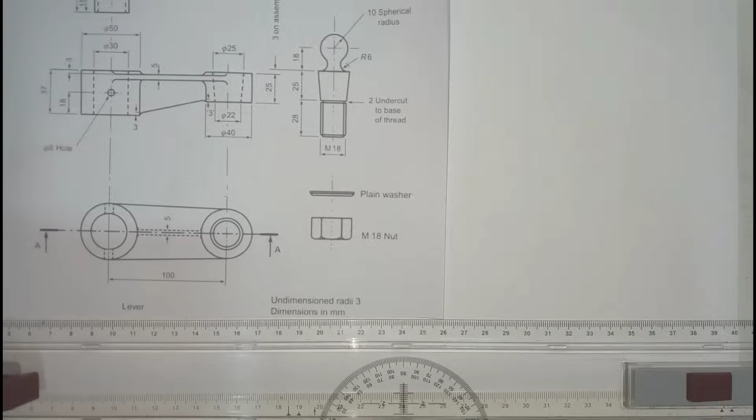In this video, we're going to look at assembly drawing. So we're given a problem and we want to draw the sectional front view on the cutting plane AA. So this is the cutting plane AA. I'll explain what it means later. And we also want to draw the plan. We're given some instruction: do not show the hidden detail of the nut.

Okay, so now we have our parts. So this is the front view, this is the plan, this is the front view, and we have this part, it's bush, this is the bush, and this is the nut, and we have a washer, and we have our ball and a tapered pin.

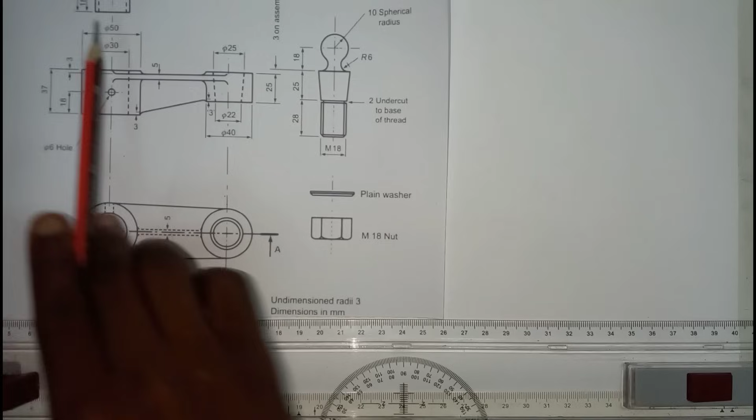So if you don't want to face challenges in assembly drawing, you have to make sure that you know what a bush looks like in real life, not on a paper. So I'm going to show what a bush looks like. So this is the bush. As you can see, on our bush we have a wall. And then if you look on this paper, you're going to see this is the wall. Then we have a ball, a bolt, a nut, and a washer.

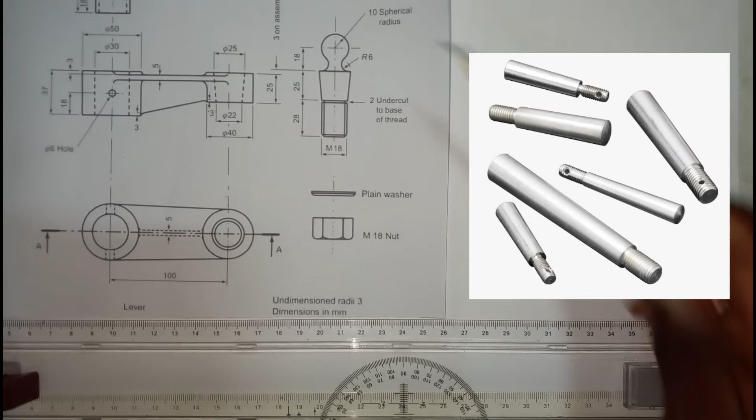So you see this washer, normally the height or the thickness of a washer is about 3 millimeter, and we're given our nut, which is M18. So if you look on the picture, you're going to see what the nut looks like. And we have this tapered pin. Our tapered pin is different from what is showing on the picture, because ours is spherical, it's ball ended.

So now I want to assemble these parts 1, 2, 3, 4, 5. This one are the same. This is the front view and this is the plan. So you should be familiar with isometric drawing, geometric drawing, and orthographic drawing. If you have challenges in those topics, this topic is going to be hard for you.

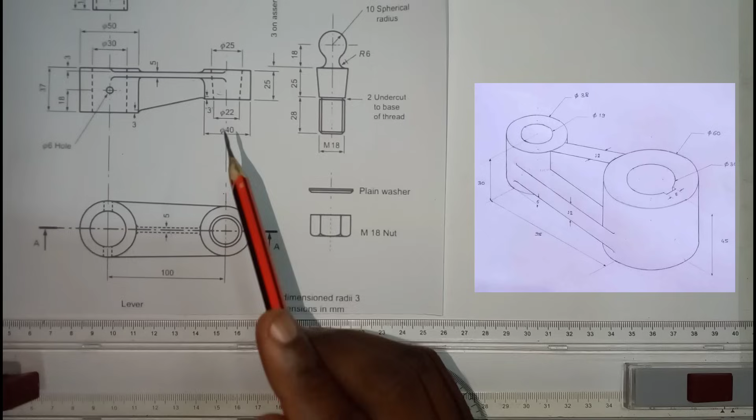For example, you should know what this part looks like in 3D. I'm going to show you what it looks like in 3D, but for you to be able to know what it looks like in 3D, you have to be familiar with isometric projection, changing this information from orthographic, which is front view and the plan, to isometric drawing. So our part in isometric drawing looks like that.

So now in assembling, there are main methods which are used to assemble these parts. The first one is with the shape. As you can see, let's say I don't know what is going here. Let's say I'm totally lost. But as you can see, we've got this shape, maybe it's a trapezium. And if you look here, we have a throw which is the same shape as this part, so that means this part will fit here.

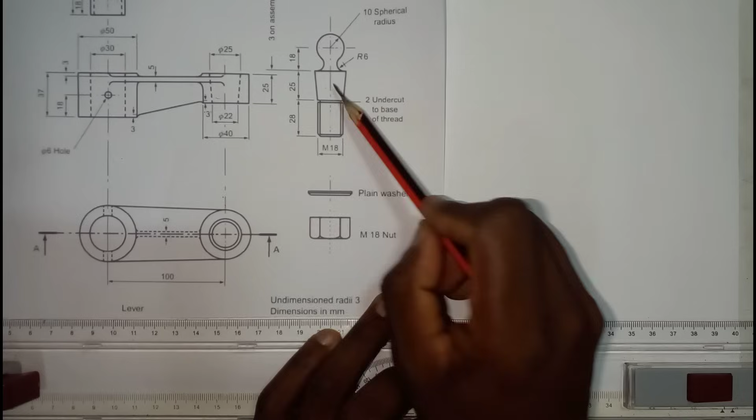Then here we have our nut, and we have a washer, and we have a bolt. So automatically we're going to put a washer and we're going to put a nut. Then if you look here, we have a small circle here and a small circle here. So that means this bush will get inside right here. But some parts may have the same shape, but not the same measurements. You should be very careful.

For example, here our bush bearing has a diameter of 30. And if you look on the plan, we have a through hole which has a diameter of 30. So that means the bush bearing will fit here. And we've got a radius. We're given information, this is M18. So that means this nut is also M18, so this nut will fit here.

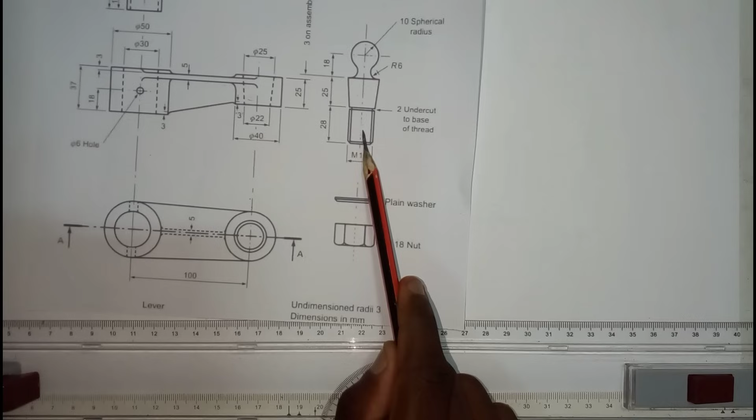So now, for geometric drawing, we're going to draw a curve which is going to touch this circle and this line. If you don't know geometric drawing, it's going to be a big challenge for you. But I have videos which explain how to draw arcs joining straight lines and circles.

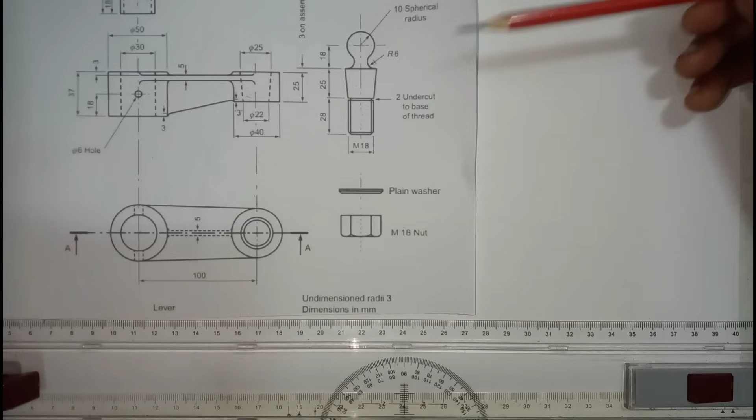Okay, so now I'm going to draw the sectional front view first. Our instruction is: with the item correctly assembled, draw twice the full size. So that means we're going to double our measurements or our dimensions. Where there's 50, we're going to say 50 times 2 and get 100. So I'm going to start with the sectional front view.

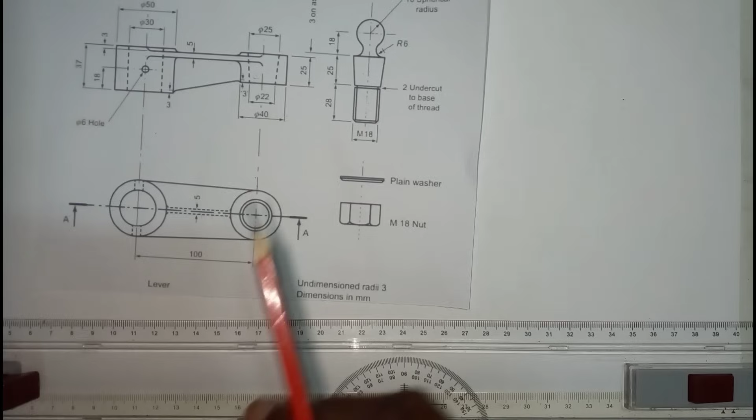I'm using 4H for construction lines, HB for outlines. As you can see, my pencils are very sharp. The secret to drawing is sharpening your pencils. If your pencils are very sharp, you're going to obtain some very smooth drawing. Now you should have a 45-degree set square. We're going to use this for hatching, and you also need your 60-degree set square, especially when you want to draw bolts. So now without wasting time, let's get started.

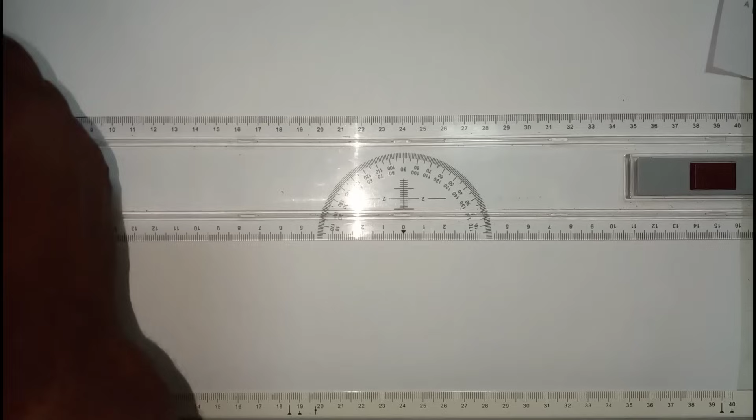Let's just divide our page into two. I want to draw our front view, which is going to be on top. So that means this information is in first angle projection. Now I want to first determine the length of our front view, which ranges from this point to this point. So we have 100 here.

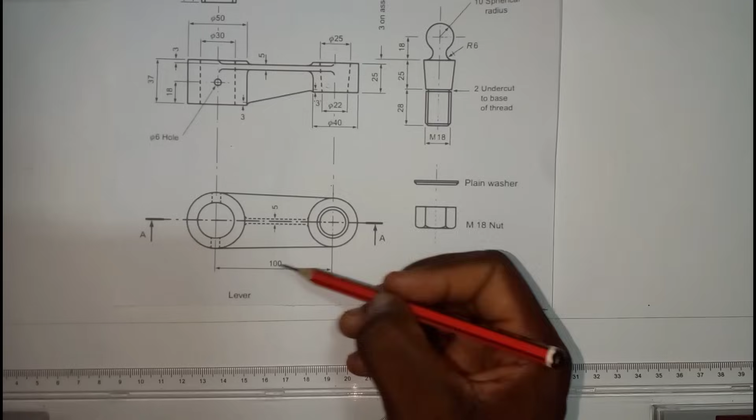And what is the radius of this circle? It's 50 divided by 2, that's going to be 25. So I'm going to say 100 plus 25, plus the radius of this circle, which is 20, that's going to be 145. And 145 times 2 gives us 290. So I'm going to measure 290, using this as my starting point. So 290 is right here. You can also just draw this with the scale 1:1. That would also be cool.

I'm going to project this line upwards, and this line upwards. Then we have to measure the height. So the height is going to be 37 plus 18, then we have the radius of this circle.

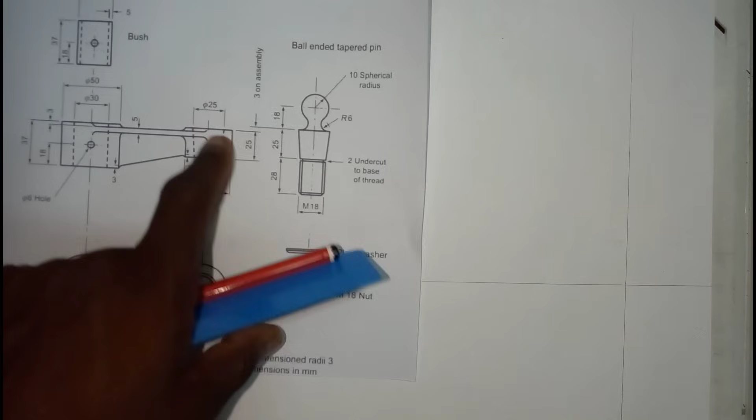Let me take my calculator. It's going to be 37 plus 18 plus the radius from here, which is 10, and that is going to be 65. If we say 65 times 2, we're going to have 130. So our total height is 130, which is here. This is going to be my total height.

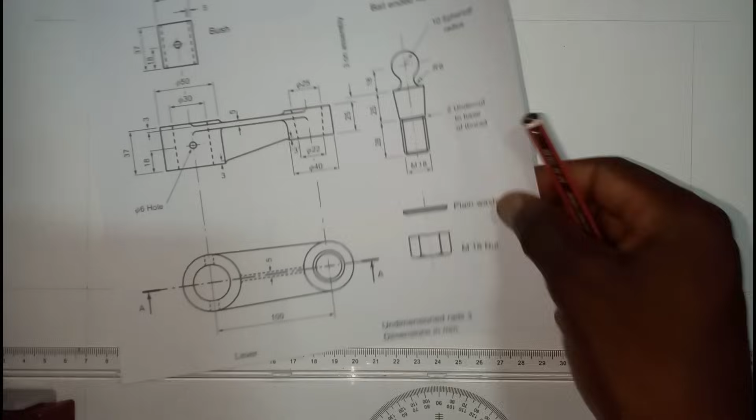Now, we said we're going to put this bush bearing here. There's something I haven't explained. This is the cutting plane. So we're going to split our part into two parts, cutting along this direction, and remove this one, so we're going to see the cross section.

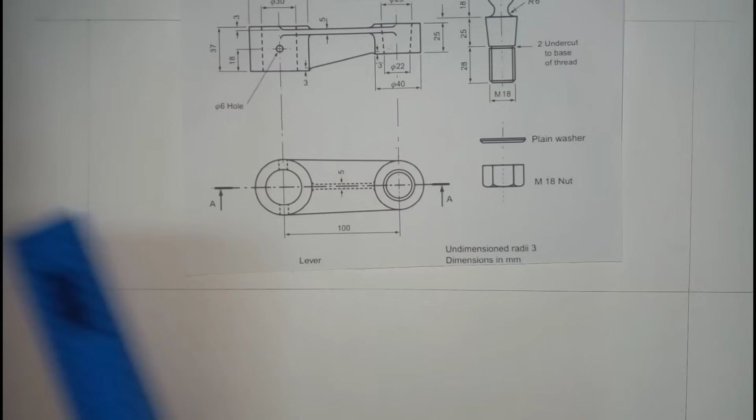So now from here to here I'm going to measure 37. 37 times 2, that is going to be 74. So I'm going to measure 74 from here. Now I have 74. 74 divided by 2 gives us 37, which is here. For the meantime, I'm just going to redraw this front view.

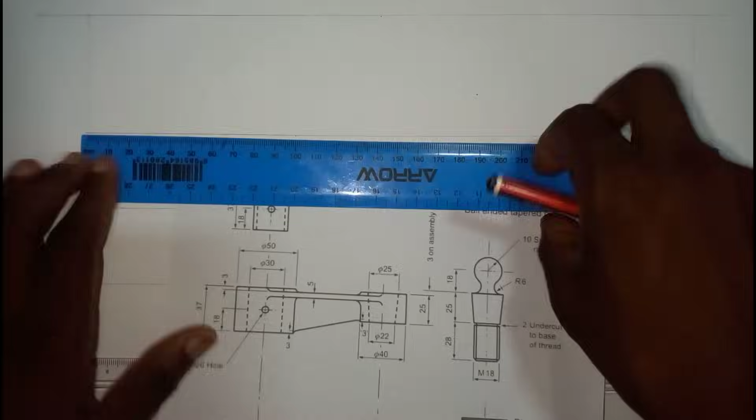Now we're going to measure. We have a diameter of 50 here, and 50 times 2 is 100. It's good to project these lines downward since we're going to use them to draw the plan as well. Then we have 30 here. 30 times 2 gives us 60. If we divide this line by 2, 100 divided by 2, we get 50 in order to draw this center line.

And now I want to measure 30 on both sides. The radius of this bush bearing is 15, and 15 times 2 gives us 30. So I'm going to measure 30 here and 30 here.

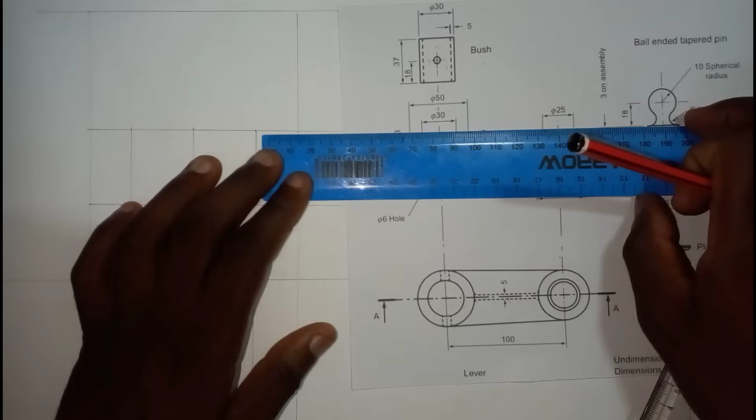Okay, like this and like this. Okay, now I want to put our bush bearing. So our bush bearing is a diameter of 30 and it's going to fit directly right here. But its thickness is 5 millimeter, so that 5 millimeter is going to be 10. So I'm going to measure 10 millimeter on both sides, 10 here and 10 here.

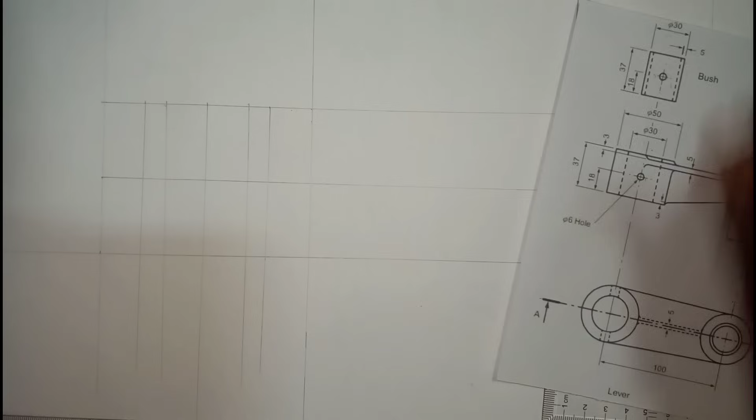Okay, and we're going to project them out downwards. Okay, so should have measured 10 here. Okay, like this. And from here to here we have distance of 3, and that is going to be 6. Going to be 6. We're going to project it. Then what else?

From here to here we've got 5 times 2, that's going to give us 10. So I'm going to measure 10 here. We're going to project it along here. Now what? From here to here we've got 6. It's 3, and 3 times 2, that is 6. If I'm using the scale 1:1, there's no need to multiply this. Just use the original dimensions. Okay, so here we just need a point.

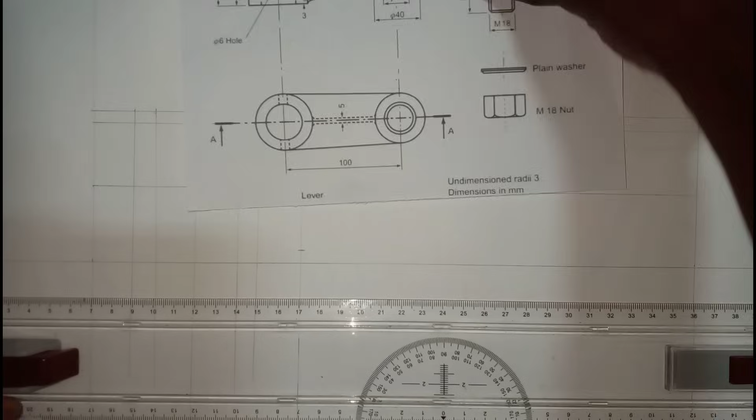Okay, now what? Coming back from this end, I want to measure 40. So from here we need to measure 40. Times 2, so it's going to be 80. Okay, something like this. Now I also need this center, so I'm going to just project it downwards.

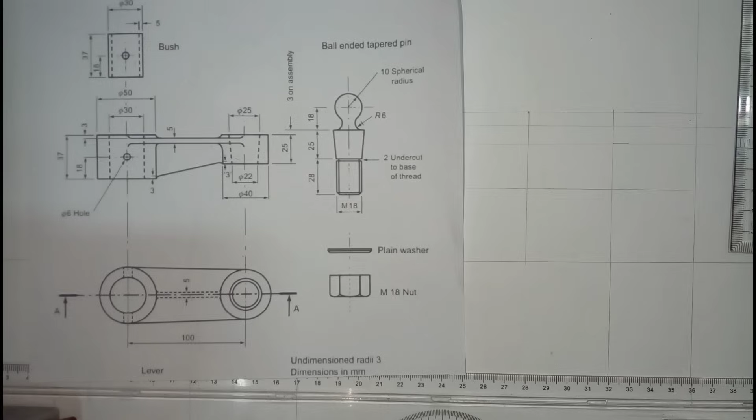Then we have a distance of 25 here, which is the diameter. 25 divided by 2, that is going to be 12.5. But since I'm multiplying every dimension by 2, I'm going to measure 25 on both sides. 25 here and 25 here. Let me mark these points, I'm going to need them. Then what is the height? The height is 25 times 2, that is going to give us 50, and 50 is here.

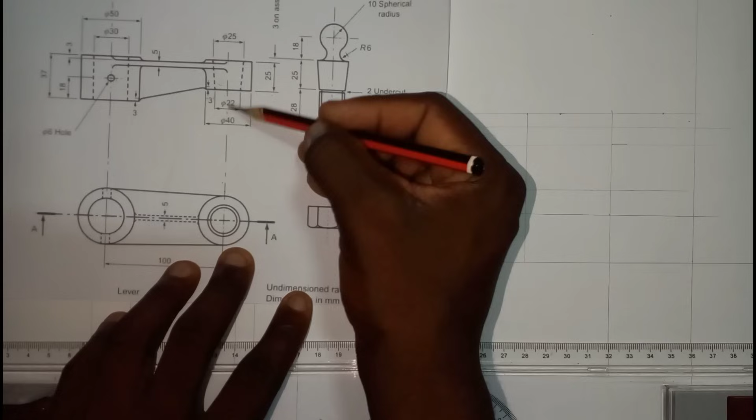Then from here to here we've got 22. So 22 divided by 2, that's going to be 11. 11 times 2, I'm going to measure 22 here and 22 here. And after that, we're going to join these two lines using construction line. I'm going to join also this. And we're going to put this tapered pin right here. So now we're saying this part is inside this part.

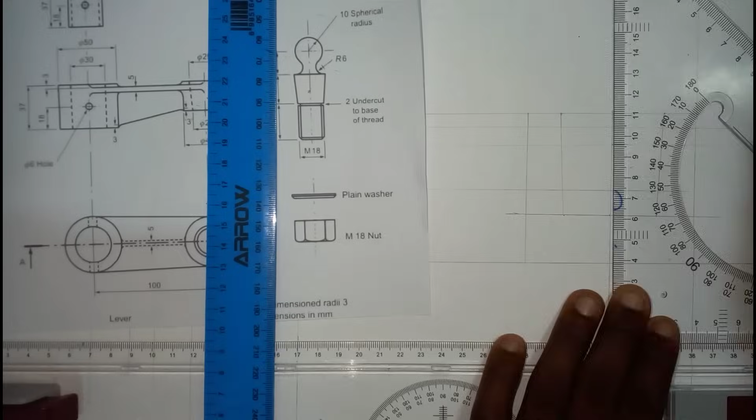So what do we have? We have a distance of 18 from here to here. 18 times 2, that is going to be 36. So we have to elongate this line. 18 times 2, we've said, is 36. So we're going to measure 36. This point 36, which is right here. Then we're going to draw a horizontal construction line.

The radius of this circle is 10, but we're going to multiply each and every dimension by 2, so it's now 20. So you take your compass, pin it at 20 right here, and I'm going to draw a circle in order to draw the head of the ball-ended tapered pin. Something like this. You have to make sure that your pencil or your compass is tight.

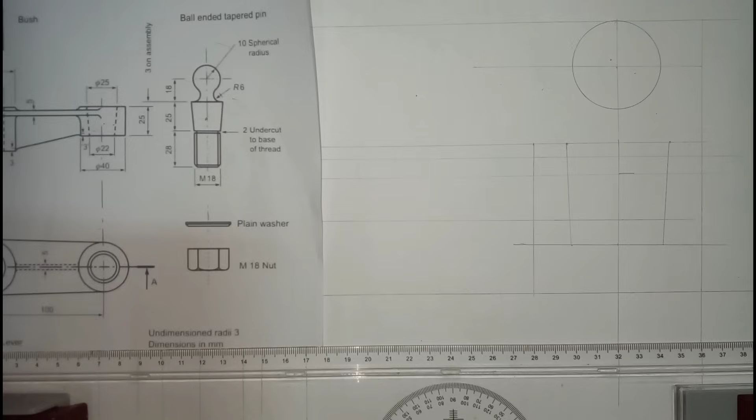Now what do we need? We have to draw an arc which is going to touch this circle and this line, and that arc is radius of 6 times 2, that's going to be 12. So I'm going to draw lines parallel to this one. So I'm going to measure 12, but I'm going to take my compass. I think that is the most recommended method. Now I've measured 12.

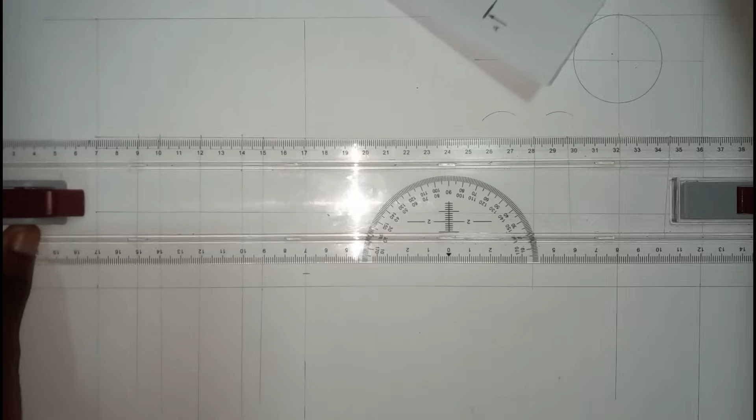Come here, I'm going to strike an arc. Come here, I'm going to strike an arc. And I'm going to join these two arcs using a straight line, and that is going to be the line parallel to this one. After that, what am I going to do?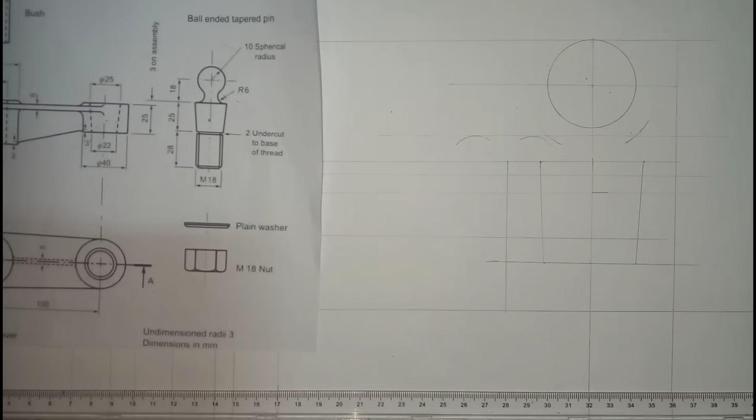This curve is going to be exterior to this circle, so I'm going to say 12 plus the radius of this spherical ball. So it's going to be 12 plus 20, and that is going to give me 32. So using this as my center, I'm going to draw an arc right here and an arc here. The intersection of this arc and this parallel line is going to be the center for the curve.

Now open my compass at 12. I'm going to draw an arc. Okay, we need something like this. Come here, going to do the same again.

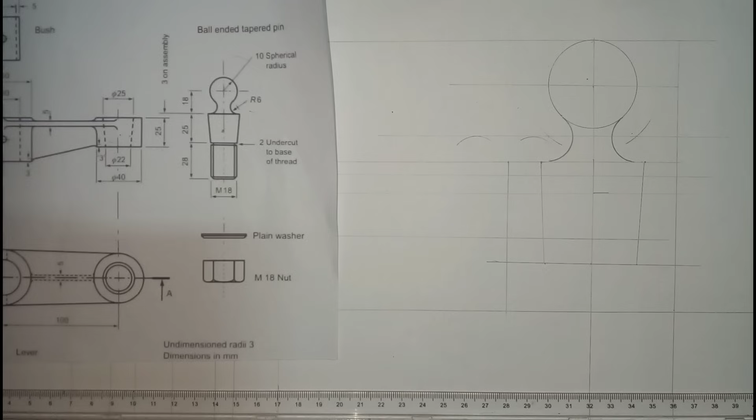Okay, something like this. So you can see we have drawn this part, a tapered pin. Now what? You have a small distance from here to here, that is 3 times 2, that is 6. So from this point I'm going to measure 6, just a point, and I'm going to join these two together.

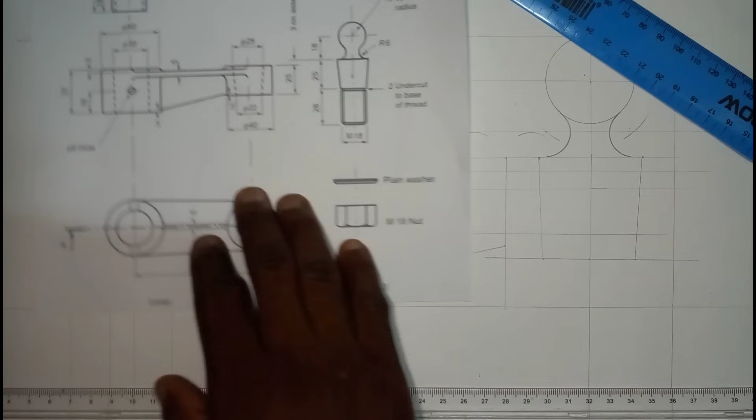Okay, then we have this undimensioned radii 3. So each and every time where you don't have the dimensions, we're going to use 3 as our dimensions. You're going to see that this line is going to touch this line, but there's a bit of a curve here, so the radius of that curve is 3, and 3 times 2 is going to give us 6. So I'm going to measure 6 right here.

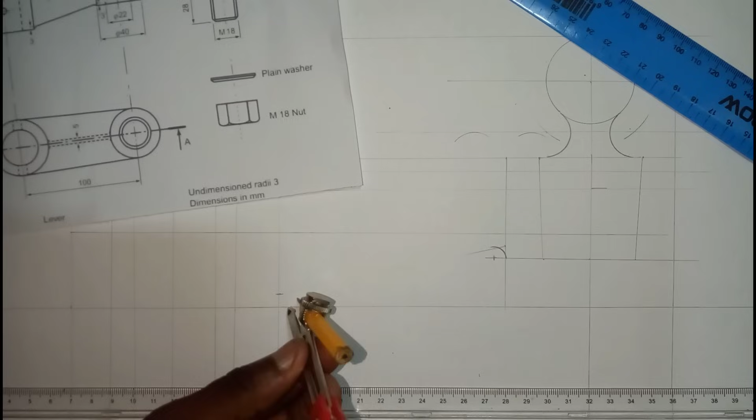And after doing that, we're going to draw an arc like this one. We're going to come here again, measure 6, and draw an arc like this, to radius of 6. So I shouldn't have drawn this line first, my bad. So now, as you can see, we can now join. Something like this. It's now nice.

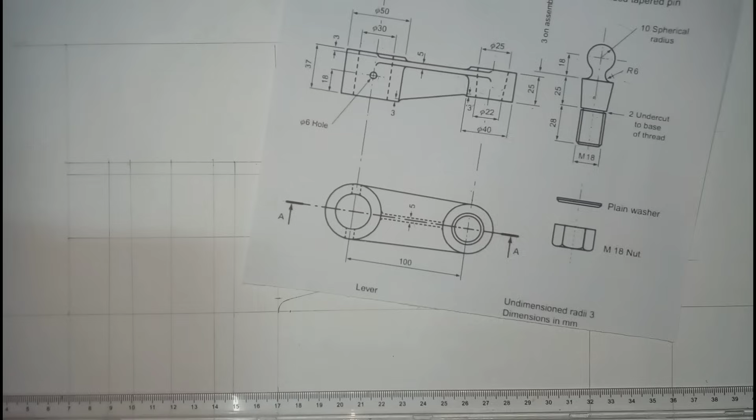I think it's better if I outline some of the parts which I've drawn so that you won't get confused. Assembly drawing may be confusing, but this is one of the easiest topics, as long as you know what you are drawing in real life. If you don't know what you are drawing, that is going to be difficult. So just go to Google, type the part you want to draw, and you're going to see its components. It's going to be easy for you. But if you don't know, you need a lot of imagination, and that will make it very hard.

But before I draw the outlines, we have a circle here. Let me just draw the circle, which is radius of 3. So I'm going to draw this circle. Actually, it's a hole on the bush bearing.

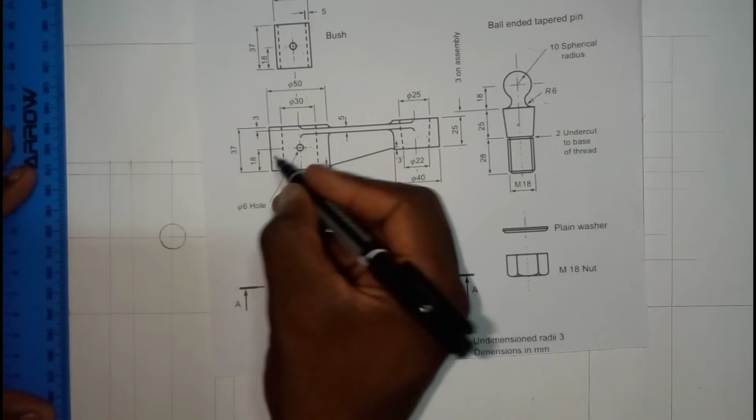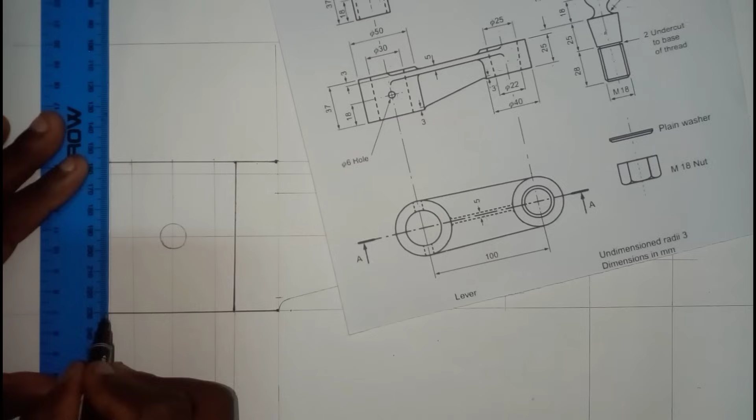Okay, now what I want to do: this line is going to be visible. This one is also going to be visible, and this one is also going to be visible. I'm not going to draw this line. This line is not going to be visible anymore since we've just cut it into 2. But our bush bearing, we need this end, so this is going to be visible, and this is going to be visible, and the inner part of our bush bearing thickness is going to be visible.

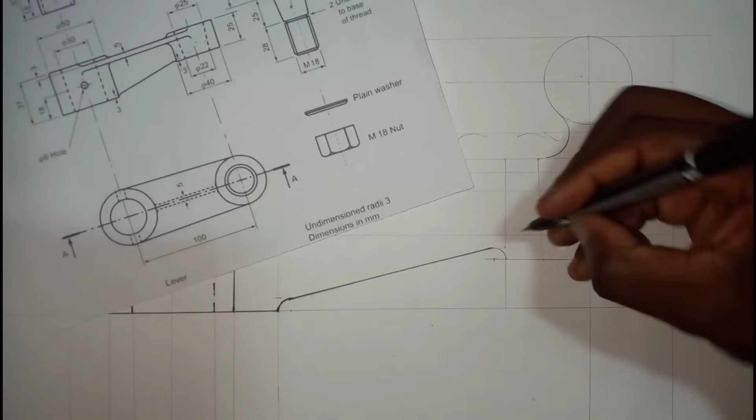So we say our bush bearing is now inside. So we're going to join these lines together. What else? We want to draw this line, but there's a curve here, and we don't have dimension for that curve, but we're going to use this undimensioned radii 3. So 3 times 2 is going to give us 6.

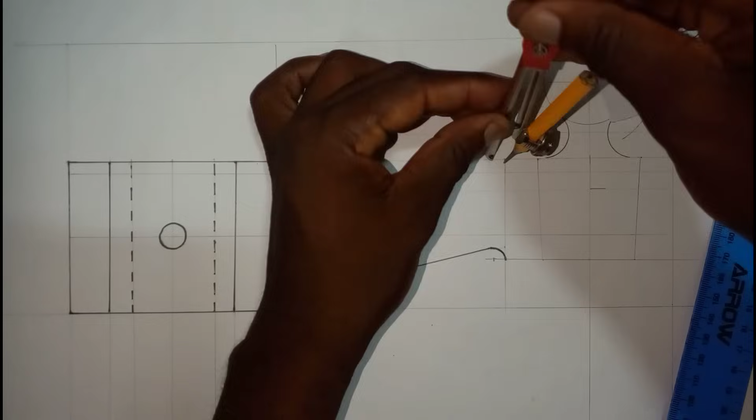So coming here, going to strike 6. After striking 6, just going to draw a smooth curve like this one. We're going to do the same here. Going to strike 6 here, and we're going to draw an arc like this one. We're going to join these two lines.

I'm using a red marker so that my drawing will be clear to you. I've received some complaints. Some people said my videos were not clear, so that's why I came up with the suggestion to use a red marker. I think that will help.

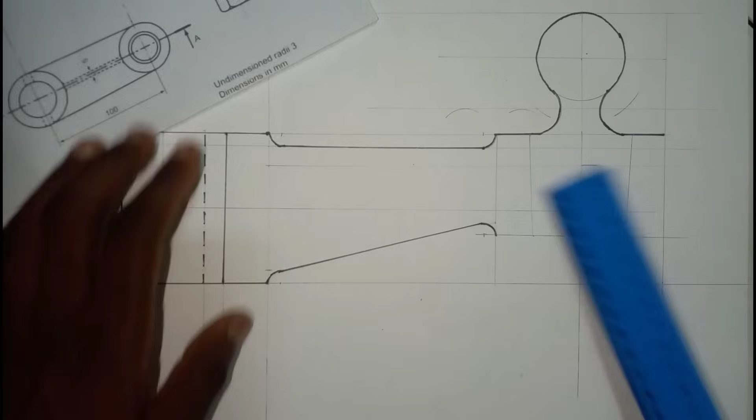And now I want to join this line. Also want to join this line. And I'm going to, like this. Okay, so this is our front view.

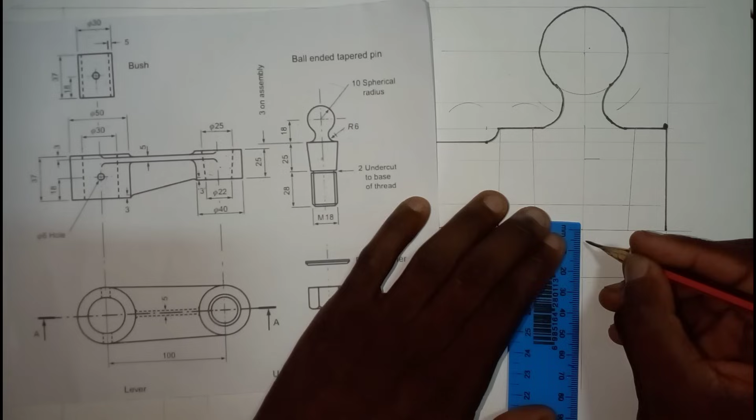Now we have a washer, so we're going to put a washer here. Say the thickness of our washer is going to be 3, and 3 times 2 is going to be 6, and we're going to put a washer. After putting a washer, we're going to put a nut. So I'm going to measure 6 from here to here. So 6 is right here.

And before I go any further, we have to project these 2 points downward. Okay, this one and this one. So this is going to be our washer, which is here. Okay, so our washer has a radius which is a bit bigger than our nut.

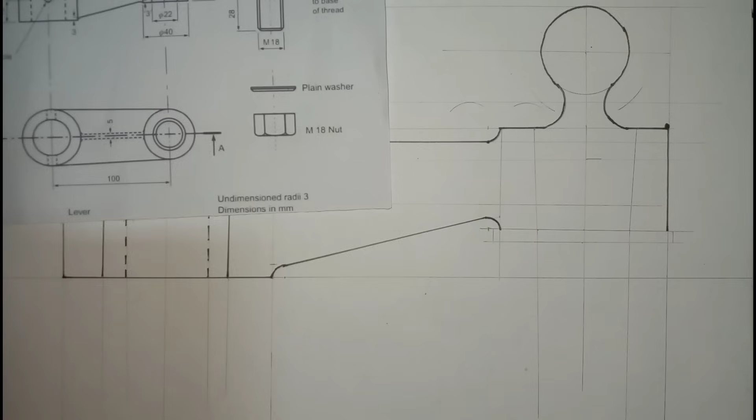Now I want to draw this nut. Okay, so for drawing this nut, first of all we have to know the height of the nut, the radius of the nut. Okay, so this is an M18 nut. So to calculate the height, we're going to say 0.7 times 18. That is the standard calculation for the height of the nut, and that is going to give us 12.6. And if we say 12.6 times 2, that is going to give us 25. So the height of our nut is going to be 25, and 25 is here.

Okay, so this is 25 from this point to this point. And now we're going to draw our nut. Okay, there are many methods to draw a nut, but the one which I prefer, I'm going to draw a hexagon. Okay, so what is the radius of my nut? So the radius of my nut is going to be 1.5 of 18, and 1.5 of 18 is 27. And what is 27 times 2? 27 times 2, that is going to give us 54. Okay, so open your compass with radius of 54.

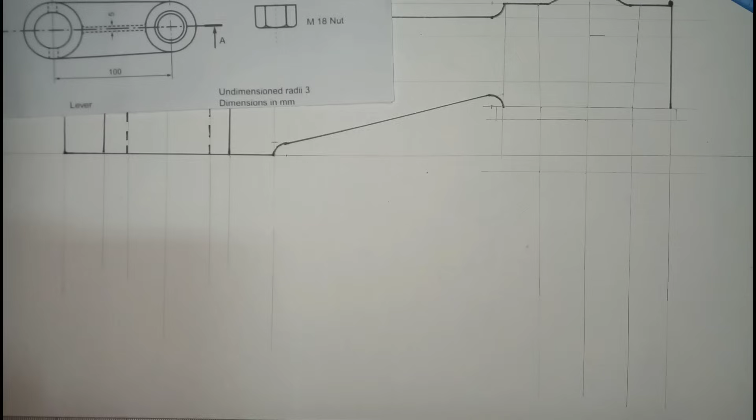Let me just use this point as my reference point. Okay, and I'm going to open my compass with 54. Okay, so 54 is going to be the diameter. I'm sorry, that is the diameter, so that means the radius will be still 27. Okay, 27. And I'm going to draw a circle. After that, I'm going to take my 60-degree set square. I want to draw a hexagon.

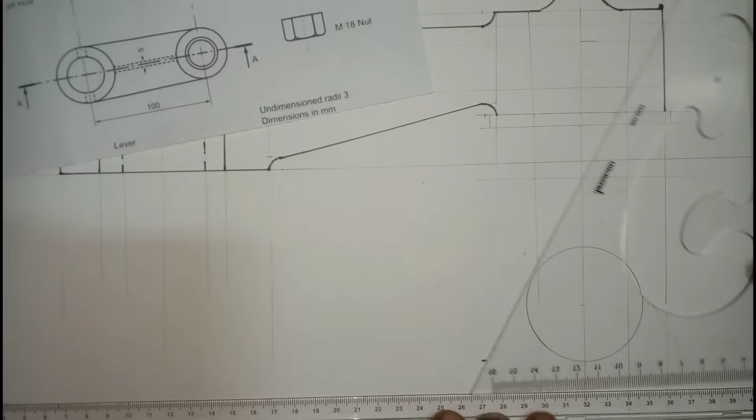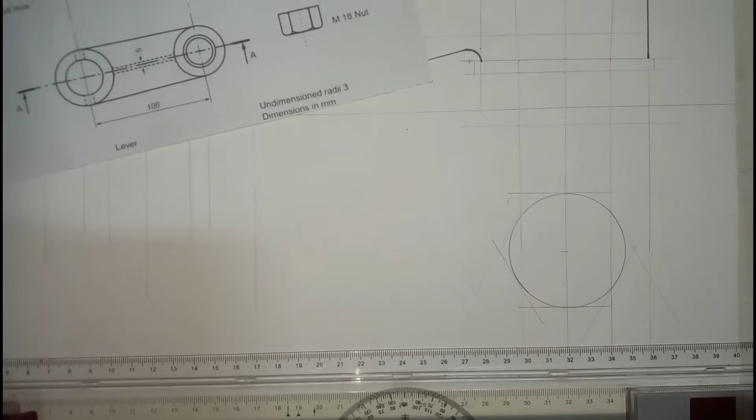So what I'm going to do, just going to draw the tangent right here. Do the same here. Do the same here. And do the same here. After that, we're going to join these two lines. Okay, now that I have my hexagon, I think it's wise if I outline it. Okay, but this is just the plan which I'm going to use to draw this nut. Okay, so it looks like this.

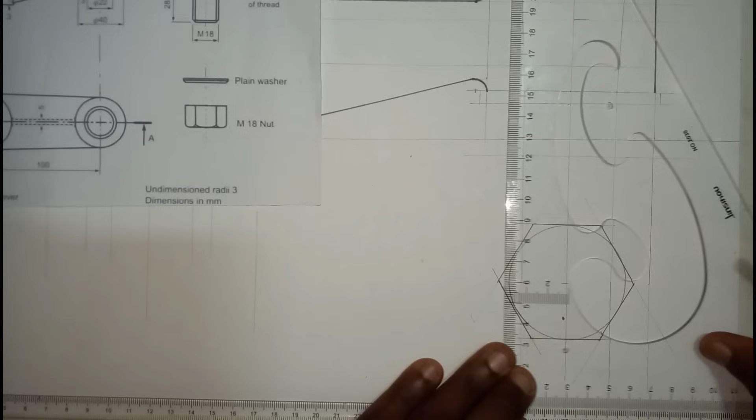Okay, and after that I'm going to project these points upwards. Okay, so I'm going to project this point. I'm also going to project this point, and I'm also going to project this point and this point. Okay, now what? Okay, so the points which I have just projected, let me highlight them here so that I don't get confused, because I have too many construction lines. So this one, we have this one, and we have this one.

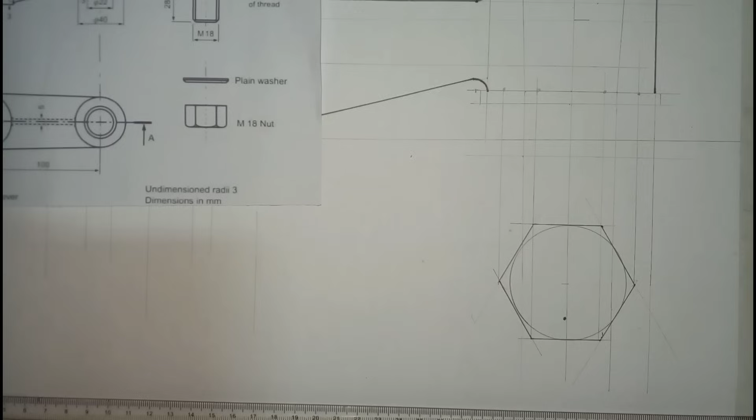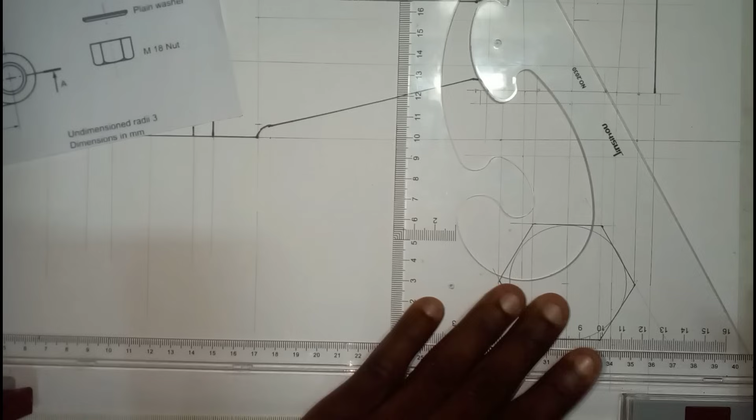Okay, so we have said that the height of our nut is 12.6, and 12.6 times 2, I'm sure I've measured it right here. Okay, now from this point, from the end of your nut, okay, so the end is right here, the end point, which is here, and the other one is here. What we're going to do, we're going to take a 60-degree set square, and we're going to draw a line which looks like this one, and we come here. On the other end, we're going to draw a line like this.

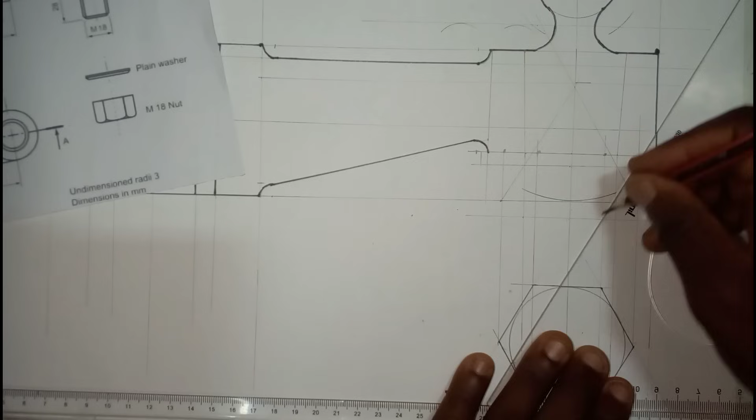Okay, you take your compass. So the point where this line and this line meet, that is going to be your center point. Now you come here on top, right here. What we're going to do, we're going to draw a smooth curve like this. Now take a 60-degree set square. So from this point, I'm going to draw a line which looks like this. I'm going to do the same here. On this point, we're going to draw a line. Okay, so the point where the line which you have drawn first meets with the line which you have just drawn is going to be the center point for the cap of our nut.

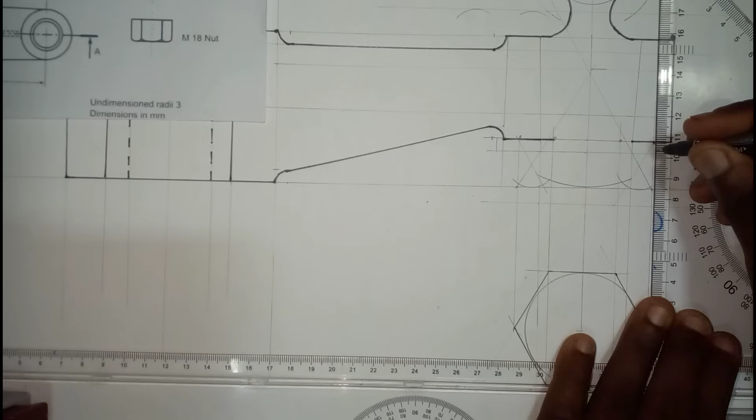Come here on top. Okay, and we're just going to draw an arc here. Come here, make sure on top, going to draw in here. Okay, so now we have our nut. So let me outline it. We've said this is our washer. Okay, so let's just draw something that looks like this. Okay, so we say this is something that looks like this, and our nut. Let us outline our nut. We have a washer here, so I'm starting from here.

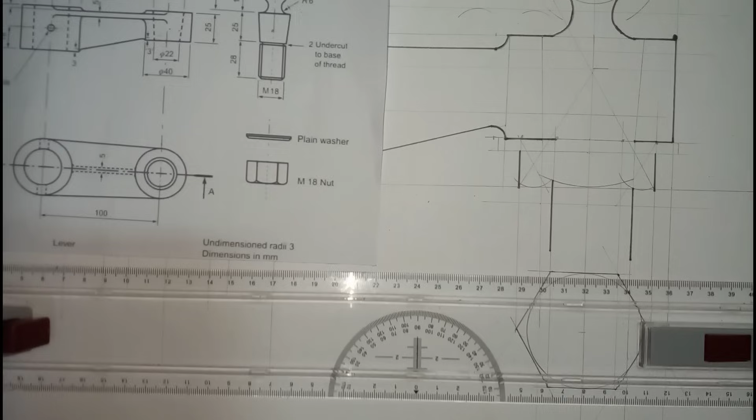Okay, and here for the bolt, it's going to extend. So the bolt is going to start from here and here. Okay, you should have measured a decent length of 25 here, but unfortunately I don't have enough space, so I'm just assuming that this distance is 25. Okay, so we've measured 25. So what we're going to do, we're going to say our M value times 0.1, 18 times 0.1, that's going to give us 1.8, and 1.8 times 2, that's going to give us 3.6. So from this point we're going to measure 3.6.

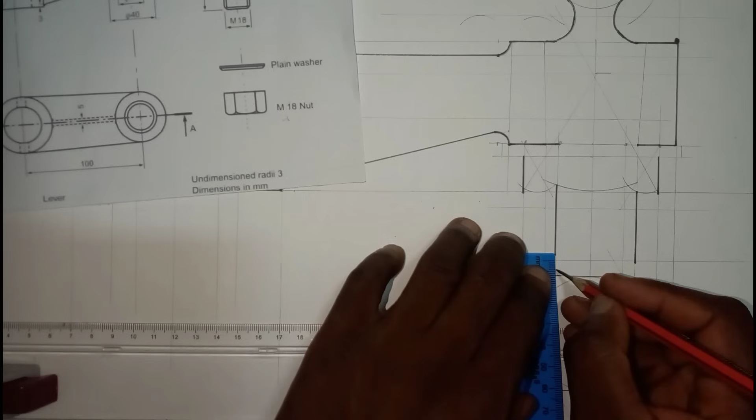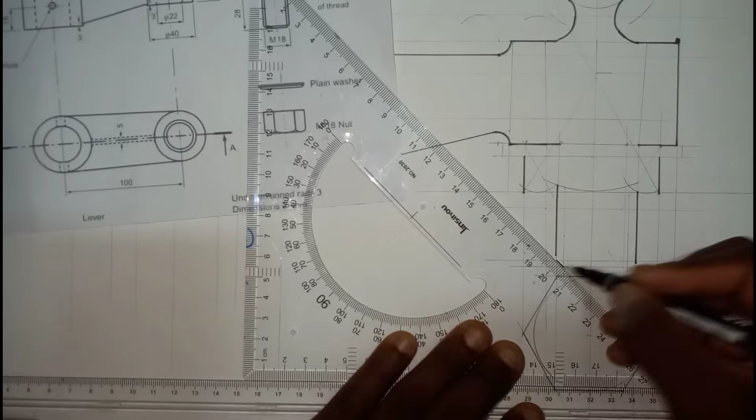Okay, so 3.6 is somewhere here, and I'm going to draw. Okay, I should have measured 3.6 going downward. Okay, 3.6 going downward, it's somewhere here, and I'm going to construct a line. I'm going to measure 3.6 inward again, and 3.6 here again. Like this, and like this. Okay, after that we're going to take a 45-degree set square to draw these ends. Okay, like this, and join these 2 points. We're going to draw the same.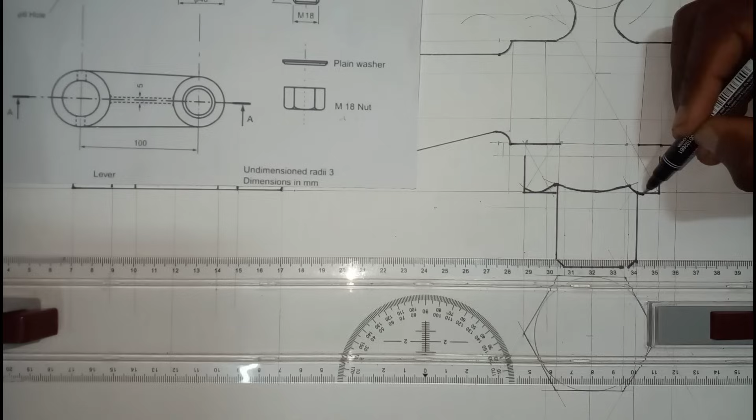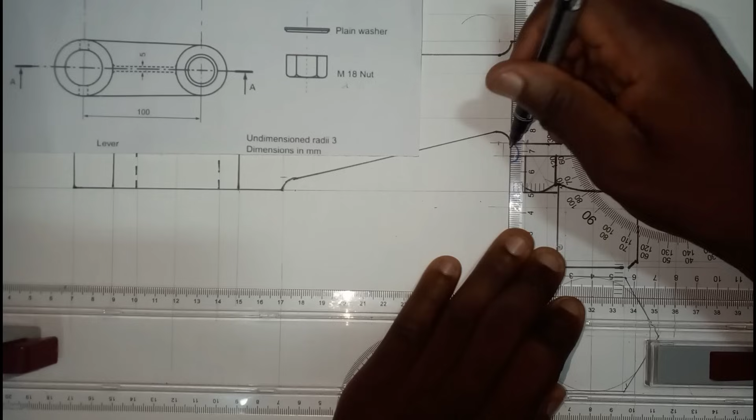Okay, now this is going to be our washer. Okay, let's make sure that these two lines are joined, and the distance that we've measured, 3.6 going out, this is the distance, and we want to join these two. Okay, so this is our bolt and nut.

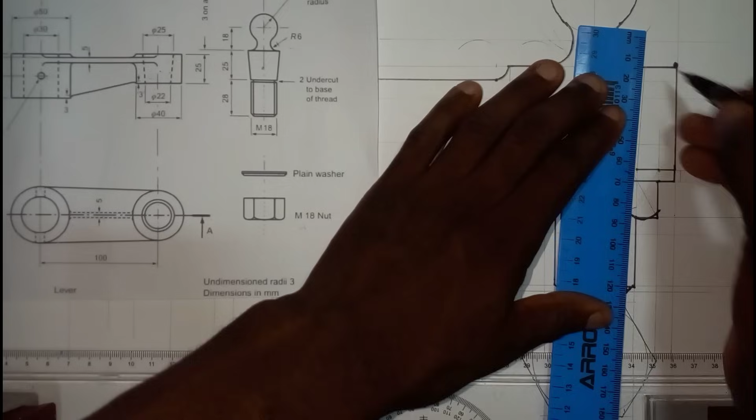Now what do we have? We have to draw these lines. Okay, something like this. Okay, I think we are done on our front view. This is our front view. So the next part is hatching. Our next stage is hatching. We want to hatch, and we hatch using the 45-degree set square. Okay, so let's say you slice this right here.

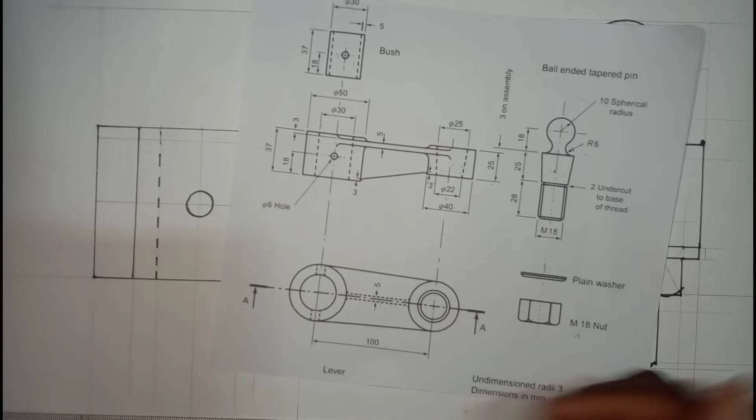Where there's a circle, we're not going to hatch. Okay, and we're not going to hatch the nut. Okay, then the other thing, if you cut it right here, let's first hatch our washer. Okay, so to hatch the washer, I'm going to use a 45-degree set square like this one. Okay, we're going to do the same here. So if we hatch a washer, this is what you do. I'm going to cross to indicate that this is a washer.

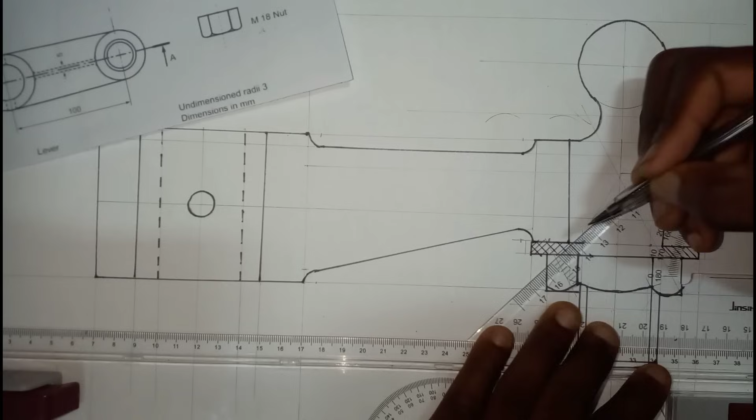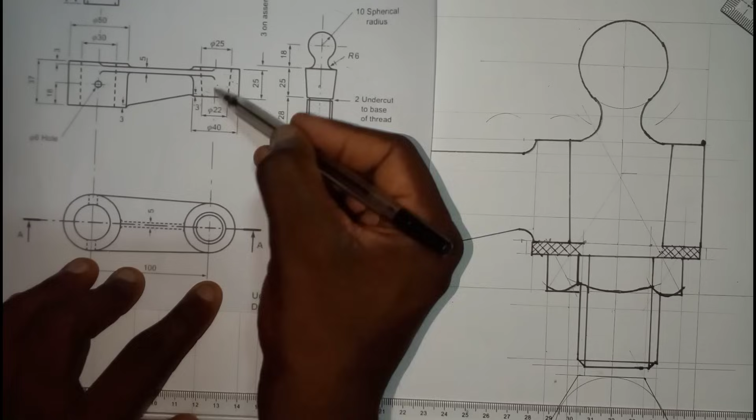Okay, so I should have drawn a construction line here. Okay, now what? So if we cut through here, we're going to slice right here. So this is not a circle, but right here you're going to see nothing. But we have a circle here, but this part of the thickness, we have to hatch it. Okay, so when you hatch, we're going to cut the thickness here, right here, and also going to cut right here, and also going to do the same here.

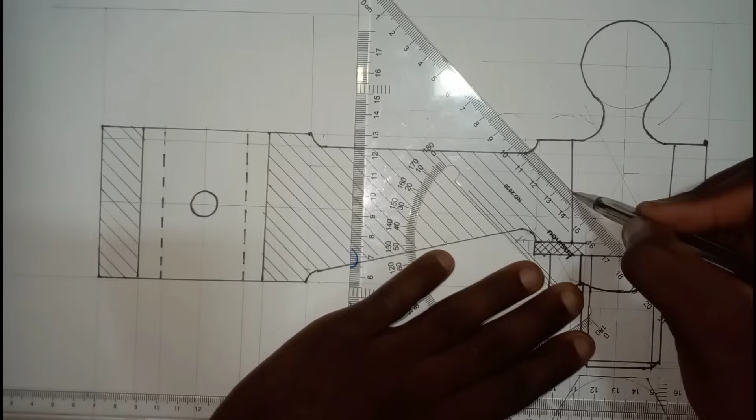So I'm going to take my 45-degree set square and hatch. Okay, I'm not going to hatch on the bush bearing since it's hollow. Okay, like this. Now what else? Remember, we are still maintaining our drawing principles. Each and every time you draw a circle, you have to draw a center line. And this is a circle. And we've got to draw a center line, very long center line. Remember, don't hatch the nut, the bolt, don't hatch the shaft.

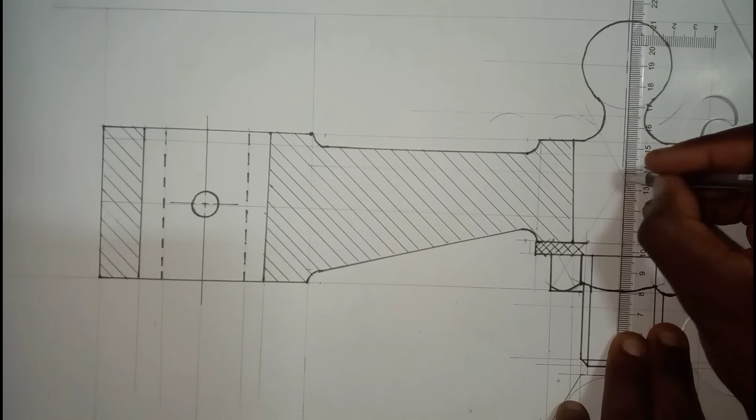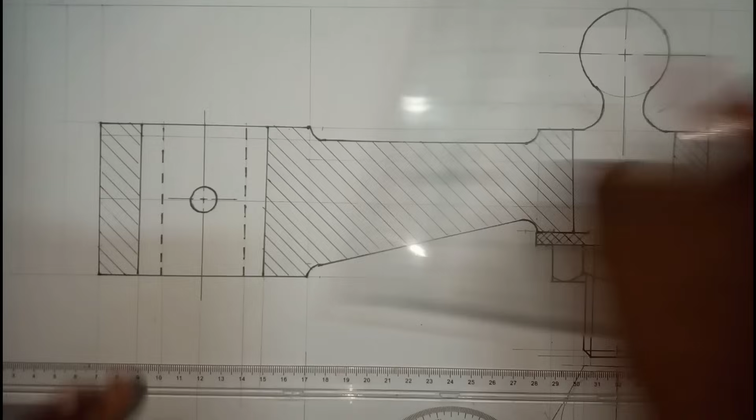Okay, and we have something like this. Now the other thing that we have to do, we want to draw the important dimensions, and that is going to be the total height. So we have to show the total height as one of the important dimensions. Okay, so what is the total height? They said the total height is 65. So let's dimension right here. And I'm going to write 130. There's no need to write millimeters, since we know that all our dimensions are in mm. Okay, and it says this is 37 times 2, and that is going to give us 74.

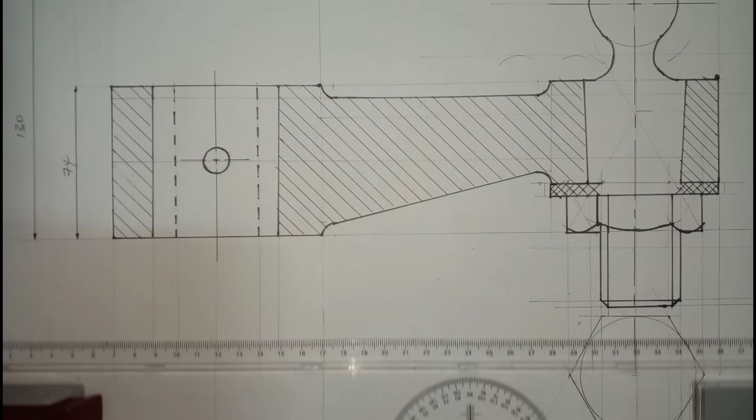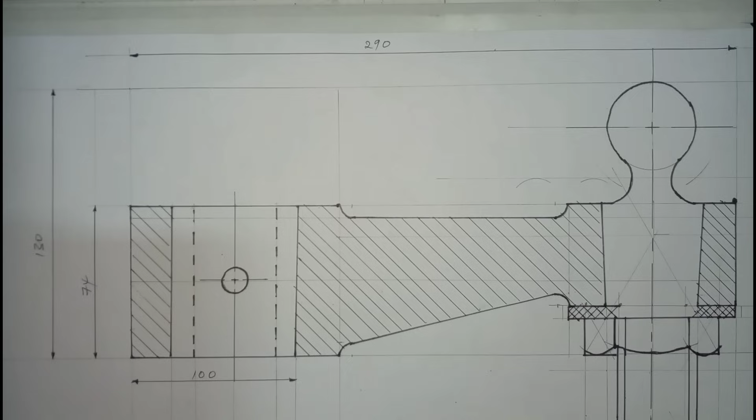Okay, the other thing, you have to indicate the total length. Okay, so I'm going to indicate it on the top right here. Okay. They've said this is 145, and we have multiplied it by 2, so it's now 290. Okay, and here on the nut we're going to write M18. Okay, so the calculations which I've used to calculate the height of the nut, I'm going to write them. You may need to use them one day.

So for the height, just say M times 0.7, and for the diameter, say M value times 1.5, and for the thickness from here to here, it's going to be M times 0.1. Okay, so this is our front view. I'm not going to draw the plan. Why? Because this is the plan. There's nothing that we're going to add, there's nothing that we're going to subtract. Just copy it, and that is the plan. But the front view is the one, because it has to be sectioned.